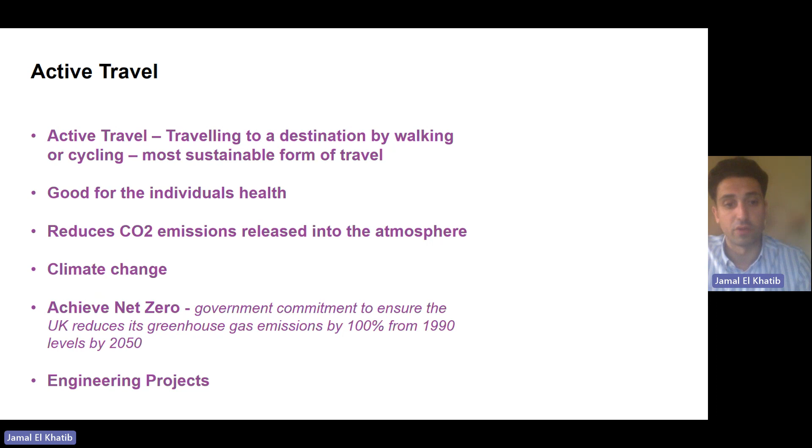So, I'll discuss one of the projects that I worked on. LPTIP is short for Leeds Public Transport Investment Programme. It's a £160 million scheme overall and consists of 5 corridor improvements and 2 park and rides.

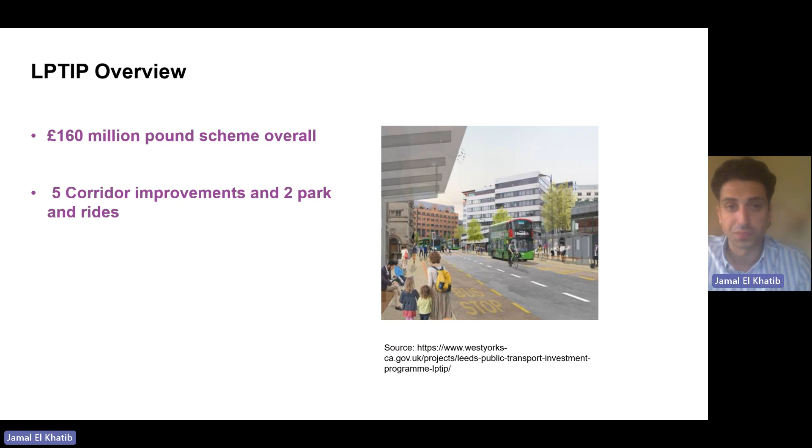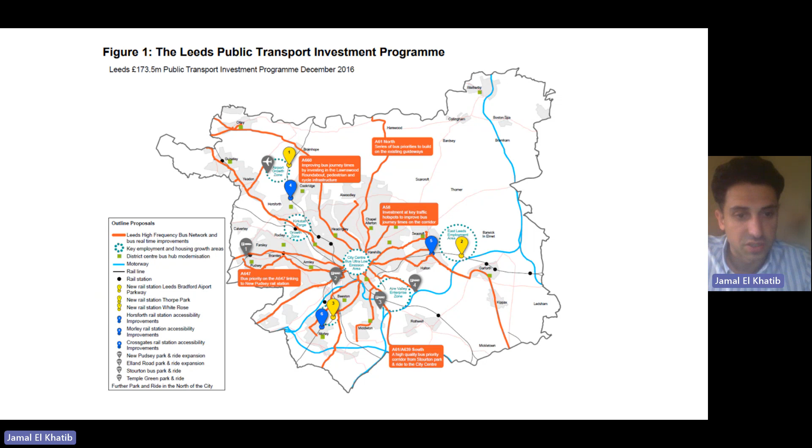Here you can see the 5 corridor improvements as part of the LPTIP, and also the 2 park and rides in the grey images at the bottom. I worked on the Stourton Park and Ride, which I'll discuss in my next slide.

Stourton Park and Ride is an innovative scheme, as it's got solar panel infrastructure above the car parking spaces. 1,200 spaces overall, with 30 bays for electric vehicle charging, so electric cars can be charged there as well. It has a £34 million budget and encourages users to cycle from the park and ride down to the city centre.

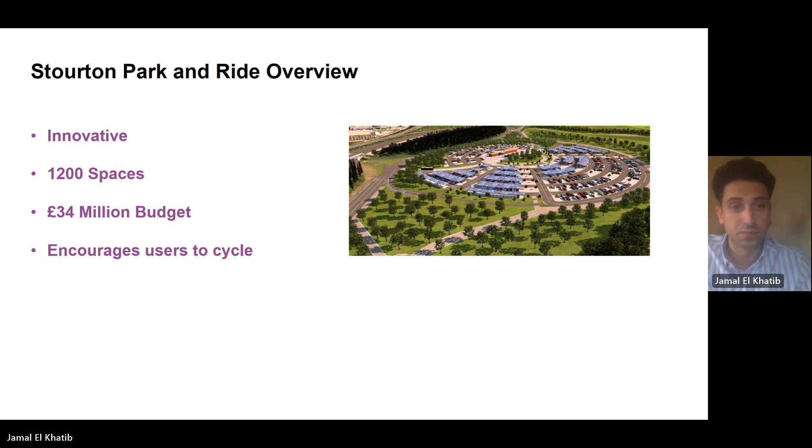As you can see, the left hand side is a satellite aerial image of Stourton before any works were done, and the right hand side is a proposal for the site.

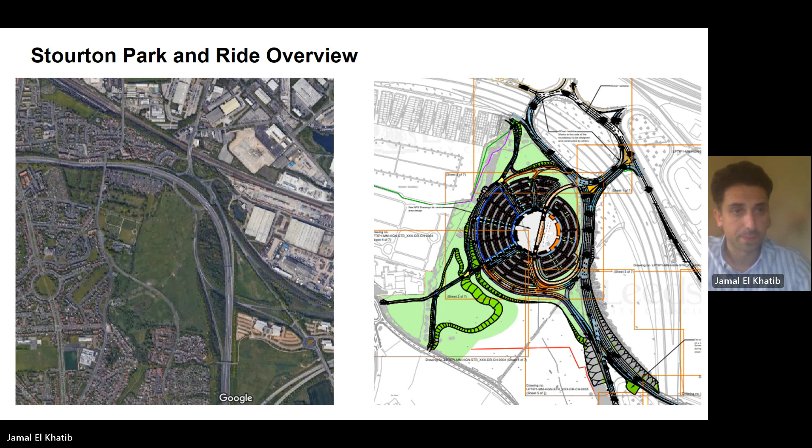My role on the Stourton Park and Ride involved preparing site investigation forms, so the contractor is informed of where to dig trial pits and undertake any GPR surveys. I also reviewed the existing utilities in the area and managed any diversions.

I managed and coordinated all the ducting for the infrastructure. I produced utility modelling guidance for colleagues in the European Design Centre, and prepared various chamber schedules. I also wrote specifications for the ducting, for the site clearance, and for access operations, as I was also part of the design team managing that package of works.

This image just shows the ducting on the scheme. The routes shown in red, blue, and purple are electricity, water, and telecoms. Underneath the cycleway and footway, you can see electricity, water, and telecoms leading up to the terminus building.

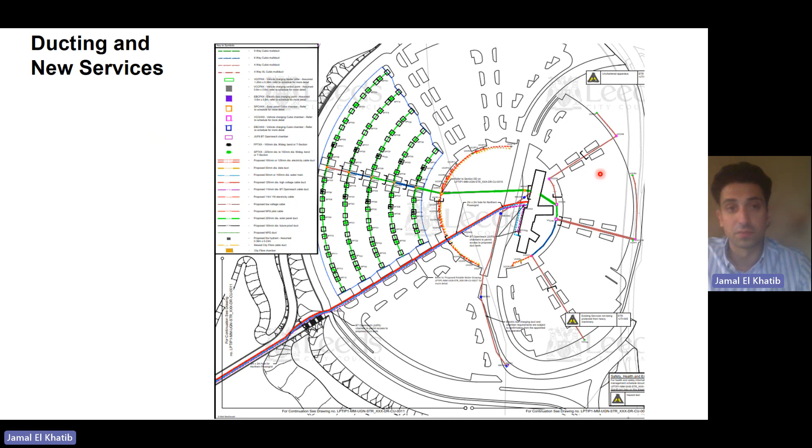Here's an example of a Cubis chamber detail. These are the chambers that were used for the ducts on the scheme. They were modular units, so they could be easily adjusted on site.

These details were produced to ensure that the chambers were of a sufficient size and accounted for the bending radius of various cable sizes.

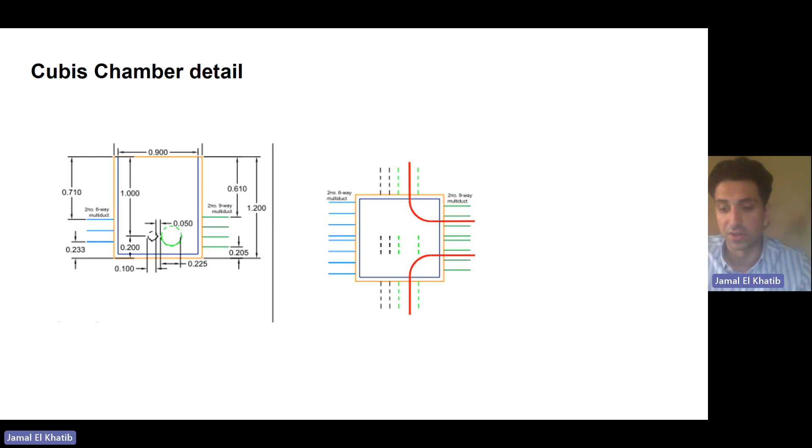So the project itself was very sustainable. The solar panels themselves help make the park and ride self-sustainable, with any excess sold back to the grid. It promotes cycling into the city centre, which is a sustainable mode of transport.

The buses themselves are electric buses, and there are also charging units for electric cars, as discussed. The project also looks at the whole life cycle, so we have provided ducting in case they ever want to expand the project and provide more charging infrastructure.

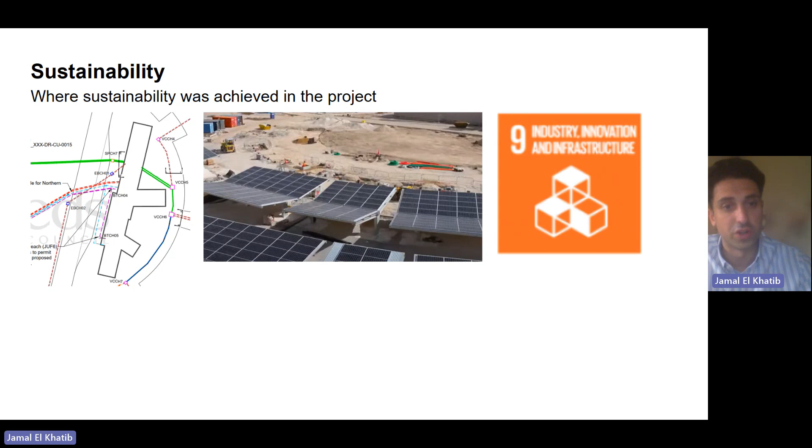The park and ride itself is in line with Sustainable Development Goal 9, industry, innovation and infrastructure, as we're providing modern technology in a civil engineering project to help achieve that net zero goal.

Hopefully this will encourage more people to use cycling and buses, which is more sustainable than if they just decided to use their car to go into the city.

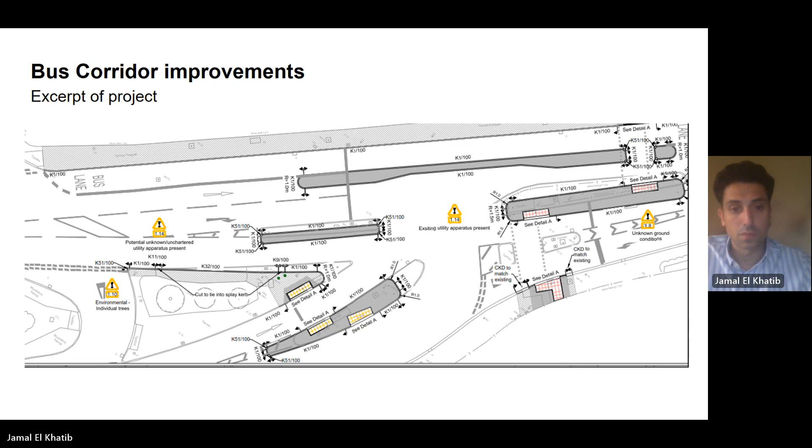And that really concludes my presentation. I hope it was informative and gives you an insight into a slightly different aspect of civil engineering.

I firmly believe that all future projects, the majority of them, will be focusing on sustainable travel and active travel, improving cycling and walking infrastructure to help achieve those net zero goals. So again, thank you for listening to my presentation, and if you have any questions, I'm more than happy to answer.